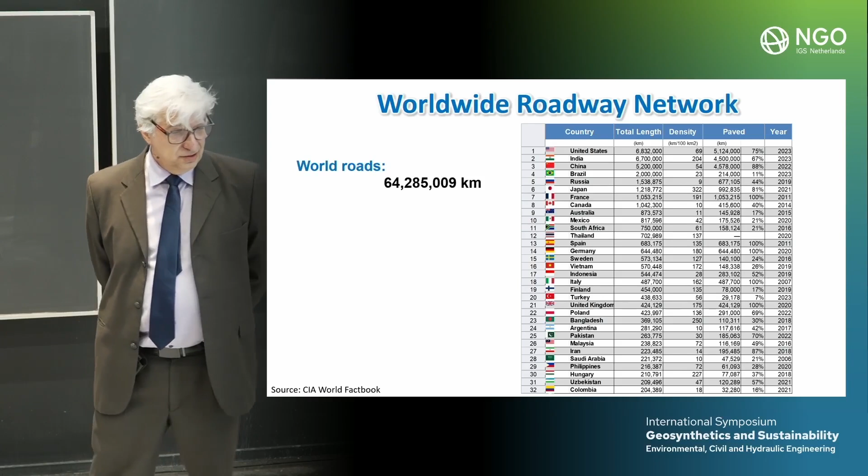It turns out that roadways is a massive asset. I understand that when it comes to public assets, roadways is the most significant public asset that we have, at least in the US for sure, and I suspect in the world. Here is the ranking of the network length, and the total length of all roads is 64 million kilometers. To have a sense of what this means, look at that. If you look at the first line here, the US has approximately 10% of the world's roads.

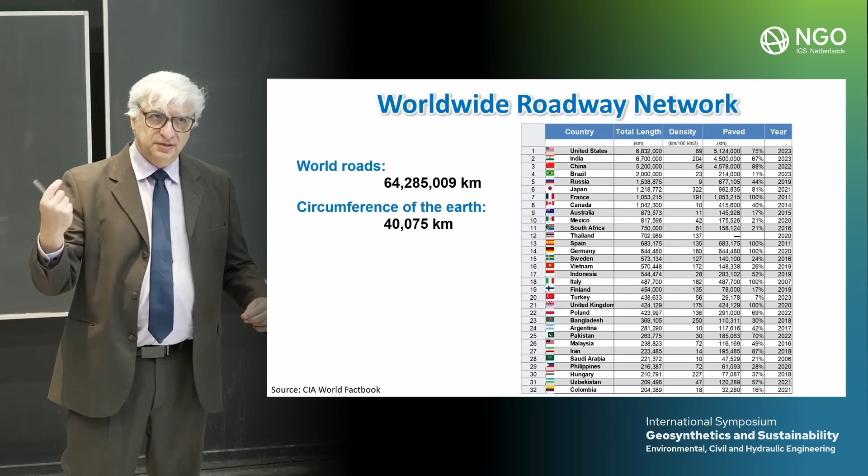Now, how big is this? Let's take the circumference of the Earth at its largest diameter at the equator. It is 40,000 kilometers. What does this mean? It means that if we were to lay the 64 million kilometers around the equator, once, twice, 3 times, 10 times, we would need to go 1,600 times around the equator in order to start thinking of how big of an asset this is.

These are roads that need to be constructed. These are roads that need to be maintained. The typical design life of a roadway is 15 years, so they are designed to be reconstructed.

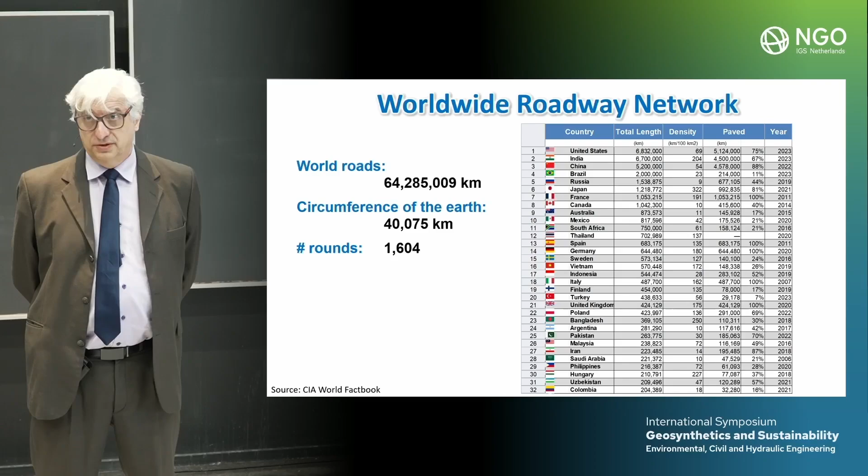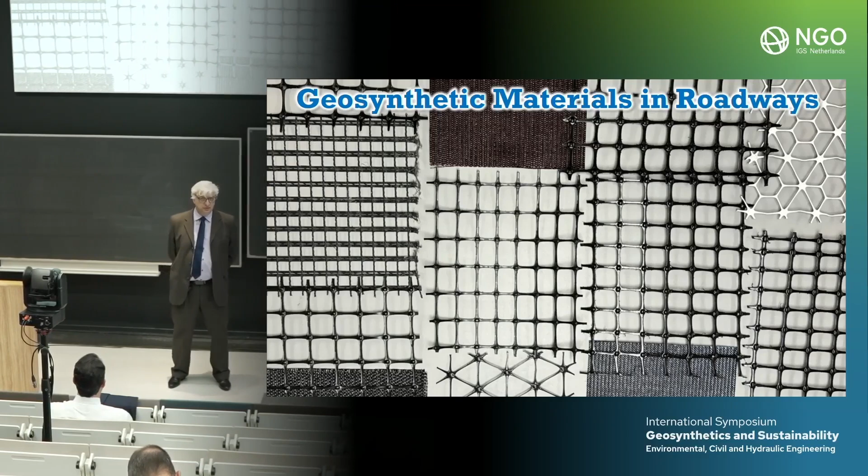Let's talk about geosynthetics, the second aspect of my presentation. There are many different wonderful types of geosynthetics, but I'm going to be talking about those used for roadway applications. That includes geotextiles, and that includes geogrids. Now, where do these geotextiles and geogrids get into the roadway?

All right, but where can geosynthetics help us in building better roads? We define geosynthetics, or an important aspect of geosynthetics, by their functions. This is because once we identify the function of a geosynthetic, we are almost there—not there, but almost there—in identifying the right properties. It's a long way to identify what are the right functions of the geosynthetic for a given application. Roadways are particularly confusing because there are so many different applications that it may get confusing to identify what are the right functions to work with.

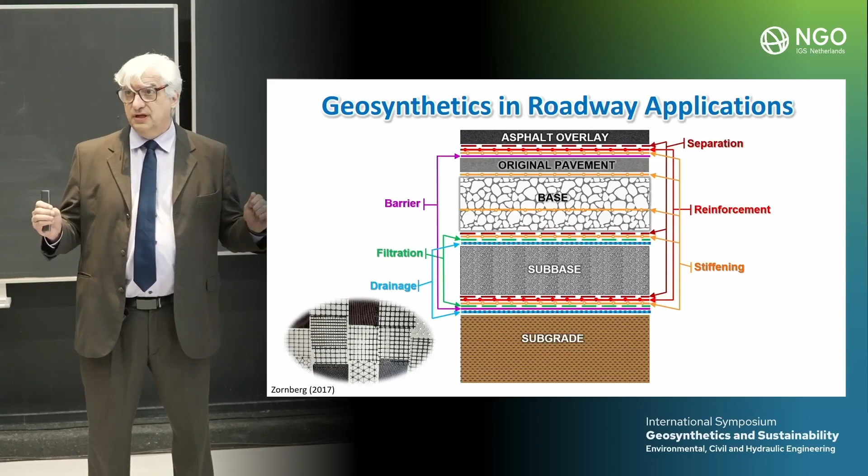All right, the third topic I'm going to speak about, but quickly, is carbon emissions. We're talking about equivalent carbon content. This is not the only way, but probably one of the most common ways of quantifying the gas emissions that affect global warming, for example.

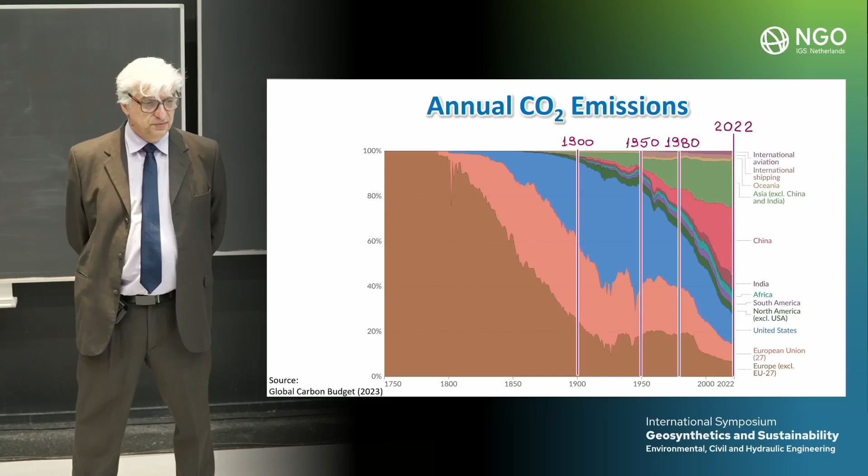So what I'm going to do now is identify 6 different applications involving geosynthetics in roadways. These are not simple applications. It's not 'give me a geosynthetic, I'll improve the performance of the roadway.' No — what aspect of the roadway do you want to improve? Only at that point will I know what functions I need, and only after I know the functions will I know what properties are required.

I'm going to focus on 6 of them. First, mitigation of reflective cracking in structural asphalt overlays. How many of you know what roadway design is? Any idea, vague concept of roadway design? Okay, just to understand how much I need to explain. All right, so we're going to start by looking at the mitigation of reflective cracking on structural asphalt overlays.

Second, stabilization of unbound aggregate layers. Third — and I'm going from the top down in the structural package, so an asphaltic layer, then unbound aggregates — then I get to the interface between the unbound aggregates and the subgrade: reduction of layer intermixing, reduction of moisture in structural layers, very different applications. Then, if I have soft subgrades, stabilization of soft subgrades, and then mitigation of distress due to shrink-swell subgrades.

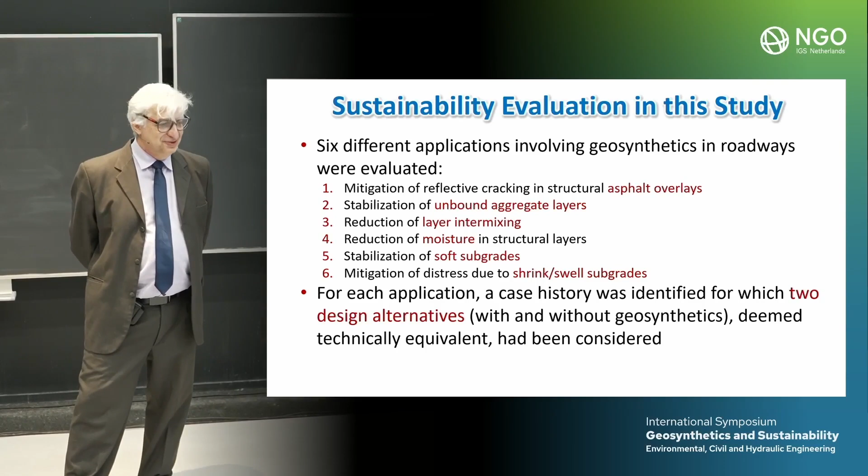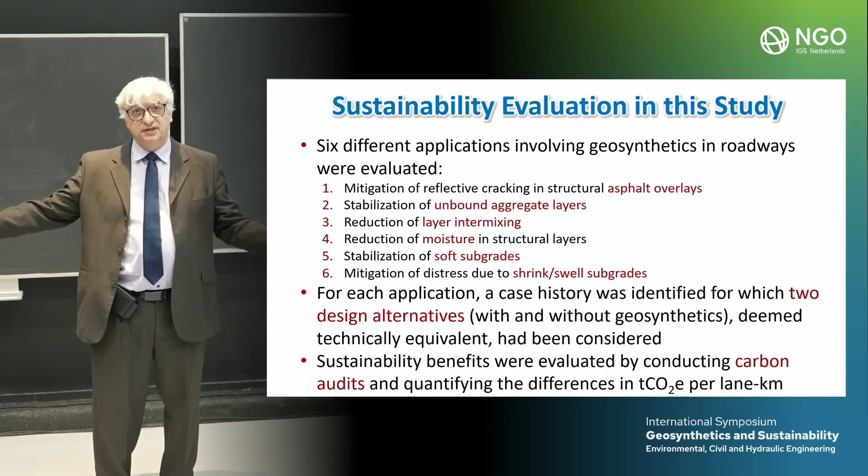So essentially, I'm going to do carbon audits. I'm going to show you the results of carbon audits of pairs of alternatives in 6 different applications. Now, I'm going to go very quickly, but it's not just me.

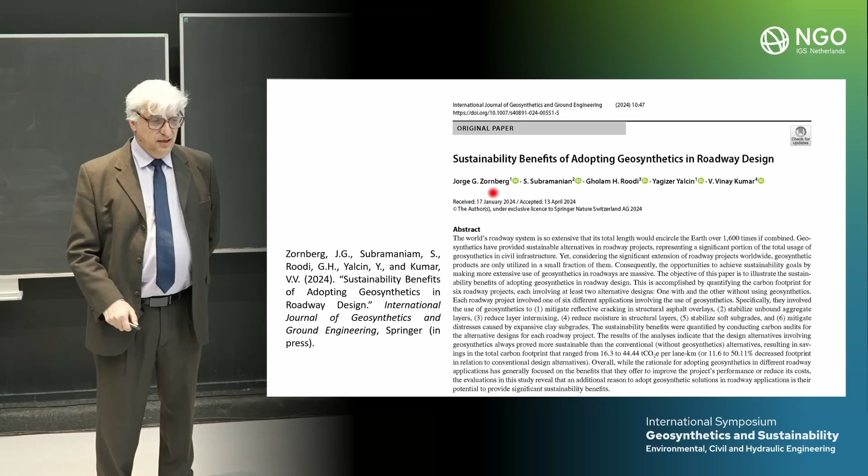This is still in press, but it is already available online. The information that I'm going to be showing you here is available in this very recent paper.

First application: mitigation of reflective cracking in asphalt overlays. What are we going to be doing? If you know what an asphalt overlay is, essentially we mill the surface of the roadway before it reaches its ultimate design life and apply a fresh overlay of asphalt. That extends the design life of the roadway. But there is a problem: this fresh asphalt is placed on top of pre-existing cracks. This creates a stress concentration that may cause a propagation, a reflection of the pre-existing cracks into the recently brand new asphalt overlay. And we do not want that.

Geosynthetics have traditionally been used to prevent, minimize, or retard this problem associated with reflective cracking. Let me show you very briefly the mechanism for each application, because I want to convey that we're not doing magic. We're not just doing what we did because we saw that it worked. We're doing it because we know how the mechanisms work to make it work.

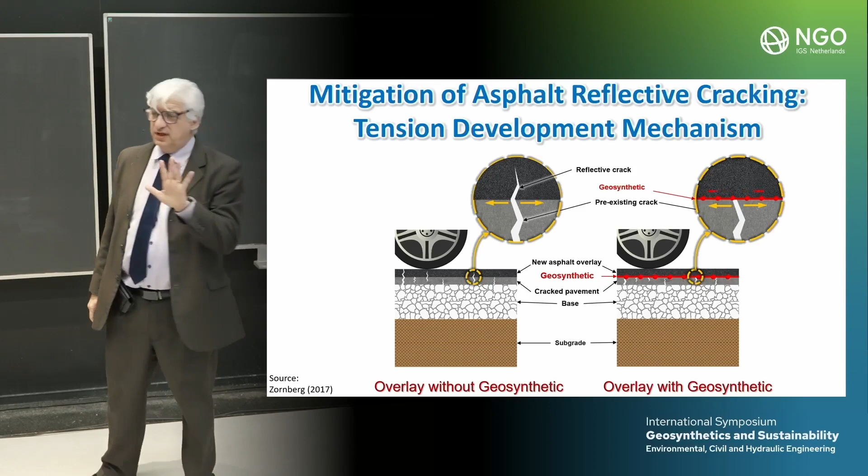What the geosynthetic will do is essentially develop tension, so that rather than having that stress concentration, the triggering of a crack is an energy concept. Rather than having that stress concentration at a very localized point, we're going to extend the area over which that straining occurs, and we're going to avoid the triggering of a crack. That's one of the mechanisms. That's not the only one, but I'm going to focus on this one.

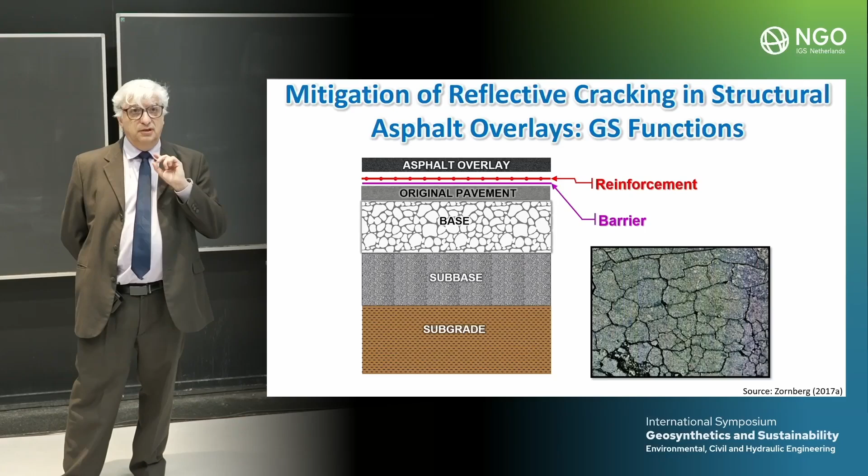So now that we understand the mechanism, we can talk about functions. The function in this case is going to be reinforcement, because we are going to be dealing with comparatively high strains. There is a different mechanism that I didn't mention here called stress relief, and there's a third mechanism called barrier. But I'm going to focus on this reinforcement, the tension development, as the one mechanism.

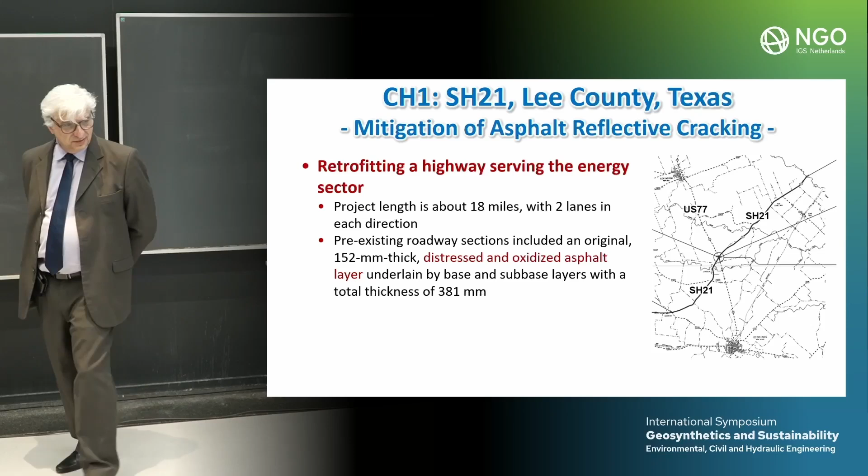So I'm going to take you now to Texas, near the place that I live. This is actually in the Austin district of the Texas Department of Transportation. And I'm going to talk to you about one important road. This road was particularly important because it serves the energy sector, fracking. What the energy sector requires is that suddenly comparatively small roads or low volume roads need a significant increase in capacity. The best way, rather than reconstructing the road, is to add structural capacity on top of the existing one. This takes us to asphalt reinforcement.

So SH21 is about 18 miles, around 30 kilometers, going from the border of one county to the end across SH21. This is Lee County. An important aspect of this project is that, in addition to having been designed to have asphalt reinforcement, we also took the opportunity to do some highly instrumented test sections. So if you're interested in this topic, you will hear a lot about SH21 in a few years.

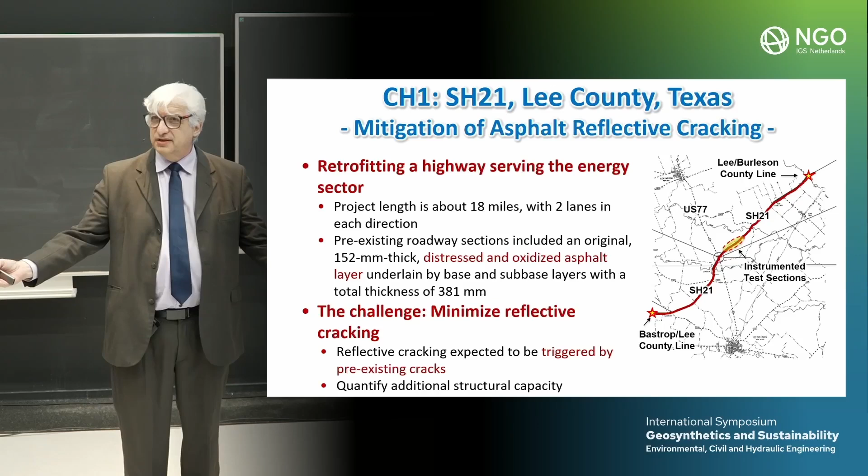So what is the challenge with this particular application? We need to retard, minimize, or hopefully eliminate the reflection of the cracks. But there's one more thing: since we're having this reinforcement to avoid the reflective cracking, does it provide any additional structural capacity? Everyone knows that the answer is yes, but we do not know how to quantify it. It is only now that we're starting to quantify the improvement of this reinforced asphalt to the increase in structural capacity. We're going to try to do that.

So in this particular project, the design requirement was to minimize the reflective cracking and hopefully increase the structural capacity. The conventional design was essentially adding a reasonably thick, 127 millimeters, that's 5 inches, of asphalt. That's more than what is needed for transportation from a capacity point of view, but it's essentially to minimize the reflective cracking.

What is the alternative? If you add a geogrid reinforcement, essentially you are trimming 50 millimeters or so of that new asphaltic layer. So how are we going to compare?

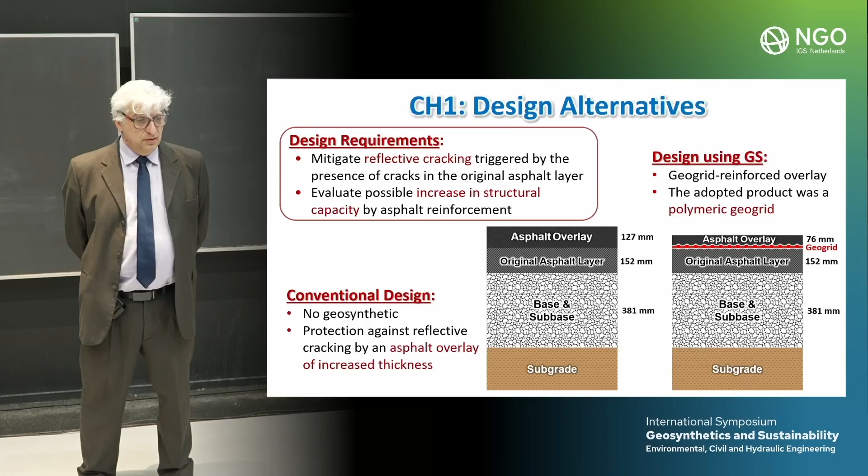Just so you know very quickly how this is constructed: here you need to do some milling, then you're going to apply a tack coat, then you are going to install, in this case, a polymeric geogrid. Finally, you construct the asphalt overlay, essentially the same approach using the same equipment that you would use without the geosynthetic.

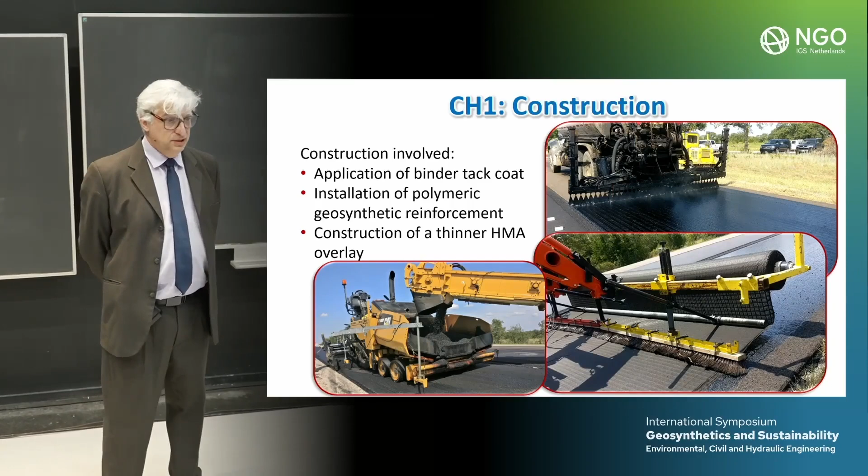So let's do the carbon audit. There were 2 design alternatives that the designers considered, and they ended up going for the geosynthetic solution for cost evaluation. They deemed that the cost of a geogrid layer was more effective financially than 2 inches, or 50 millimeters, of asphalt.

But let's see what happens if we compare the carbon content of these two solutions. Here we have the conventional design and the geosynthetic design, with their different components. I'm not going to walk you through how we did this carbon audit, but essentially, in blue you have the embodied carbon in the materials themselves, then transportation in orange, and then construction.

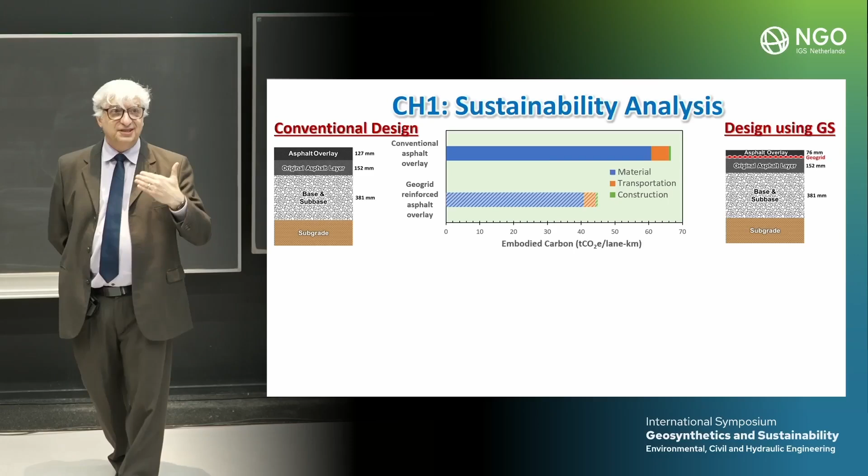Materials carry significant burden, and we're only talking about the materials for the overlay, not the entire structural package. Any time we see an asphaltic layer, think of embodied carbon. The asphalt carries a lot of embodied carbon, so any inch, any centimeter of asphaltic layer that we can drop, we significantly save in embodied carbon.

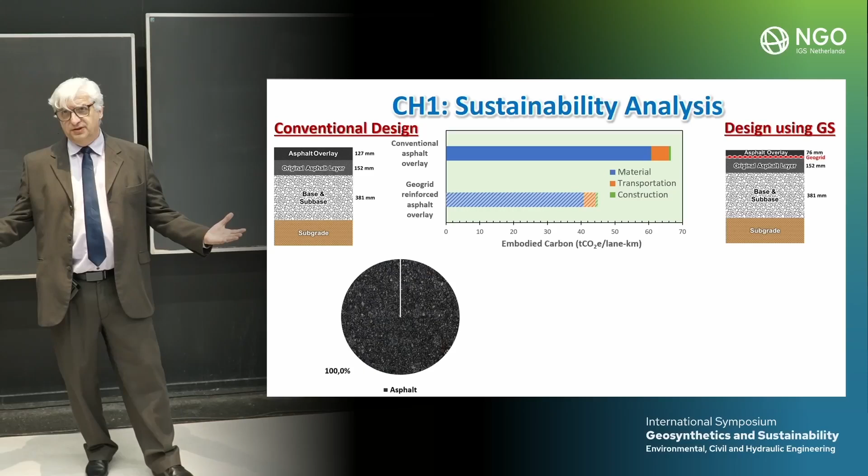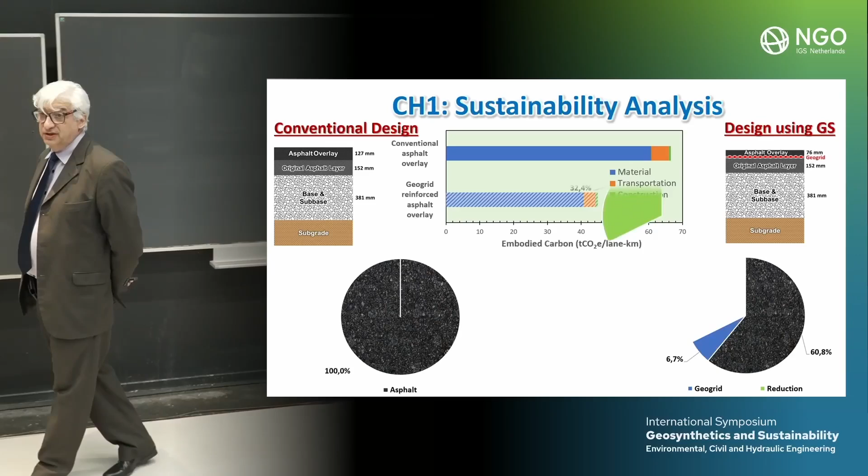Let me show you what this means. In the conventional design, because it's just an asphaltic layer, the entire source comes from the asphalt. If we go to the geosynthetic solution, we decrease the contribution from the asphaltic layer. We have a contribution from the geogrid, but we save this green 32%.

32% of the embodied carbon of the entire project was saved by choosing this solution. And again, the designers didn't think of embodied carbon when selecting it, they just did it based on performance and cost, but by doing so you save 32% of the embodied carbon.

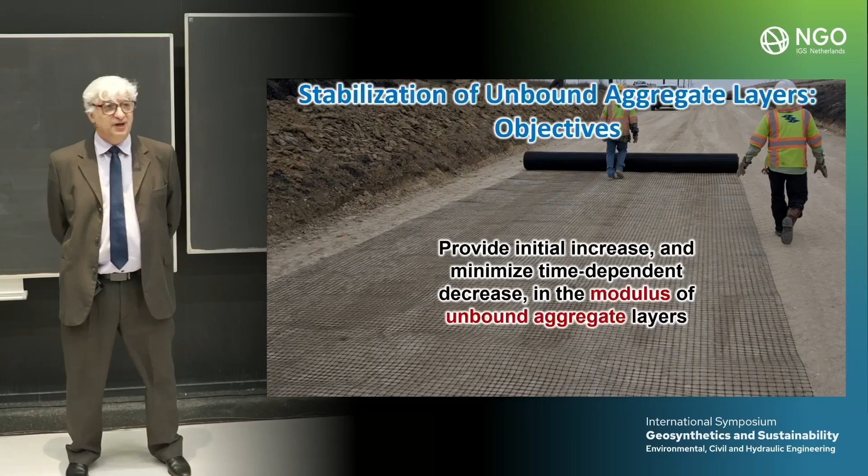All right, so we have application number 1. Let me walk you through a second application of geosynthetics in roadways: the stabilization of unbound aggregate layers. The objective, what do we ask for this unbound aggregate layer? We ask, give me stiffness. I want stiffness, because stiffness will distribute the load in a wider area.

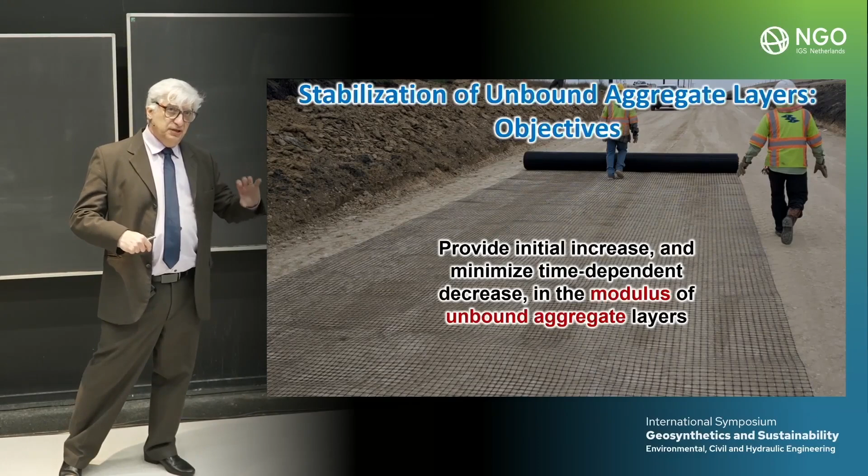So the objective of using geosynthetics for this application is to provide an initial increase, and equally or more important, to minimize or avoid the decrease of the modulus of the unbound aggregate layer, the base and subbase. So how does this work?

And it's not trivial how this works. There were many competing mechanisms that academia and industry were debating, what is the right mechanism. We know that it works, but we didn't know why. We need to know why it works, because without that we cannot choose the right functions. But this is how it works, there is consensus on this.

The consensus is on a mechanism called lateral restraint. Here's how it goes: you have a non-stabilized road base, and with the cyclic loading that takes place, there's a tendency for the aggregates, which are clean aggregates and only stiff because they are confined, to displace laterally over time. And this is a domino effect.

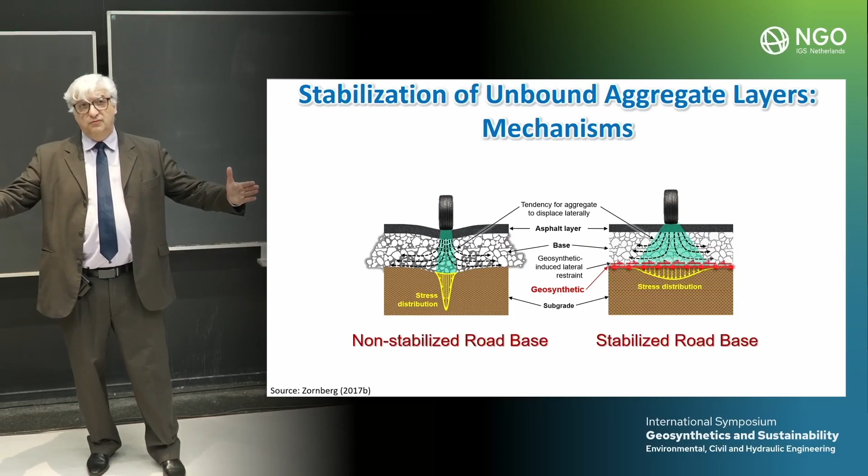If we have that lateral displacement, we have a loss in confinement. If we have a loss in confinement, we have a loss in modulus. If we have a loss in modulus, we have a highly concentrated load, and that leads to early failure of my roadway. Instead, what the geosynthetic will do is essentially prevent or minimize this lateral movement, that's why we call this mechanism lateral restraint.

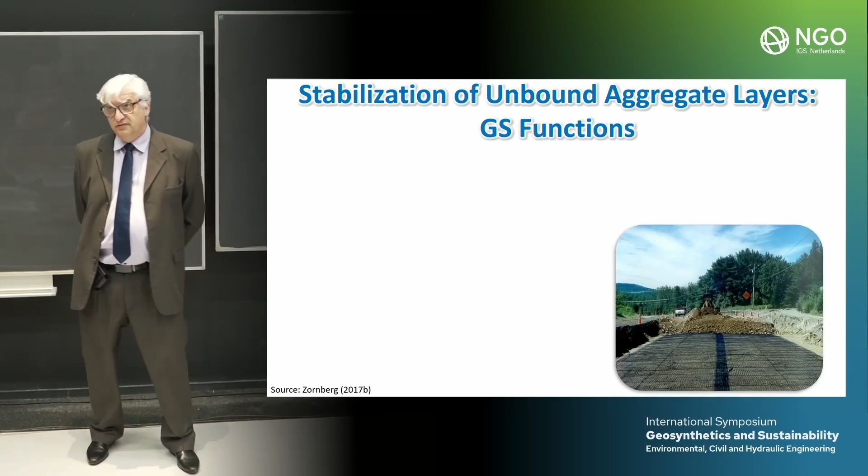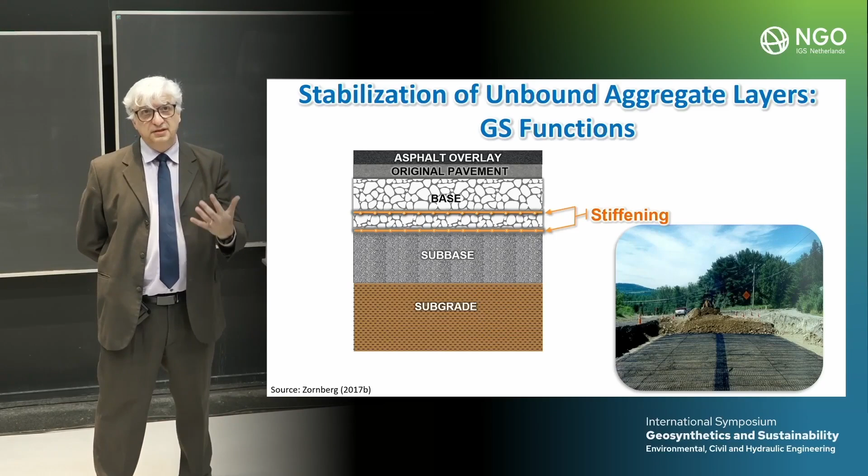So only now that we know the mechanism, we can go to the function. And the function is only one: the function will be stiffening. We want to add stiffness, or the capability of gaining stiffness, to our unbound aggregate layer.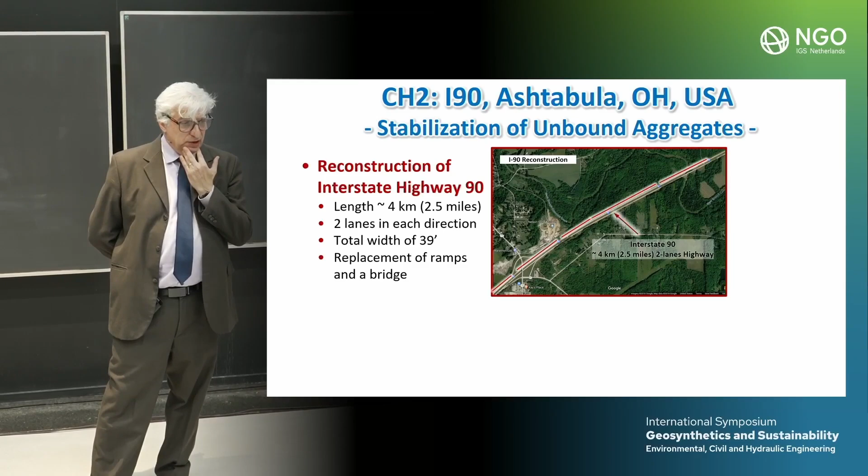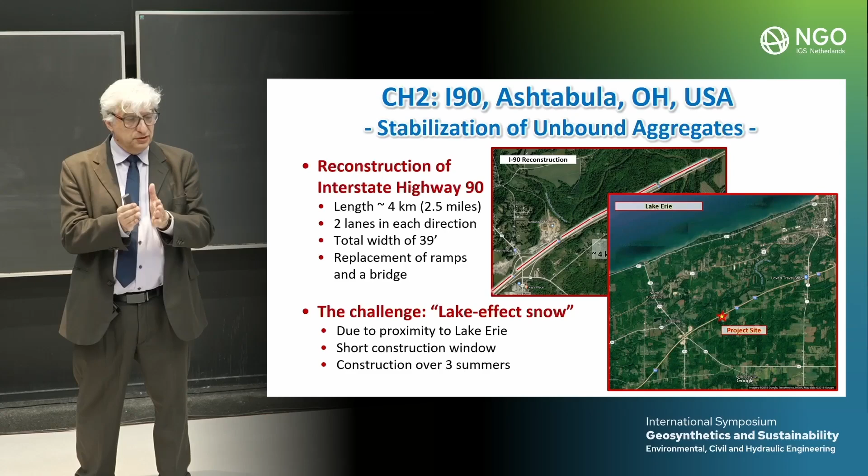Let me take you to an example, a project. This is in Ohio, also in the US, for stabilization of unbound aggregate. This is near Lake Erie, a 4 kilometer road with 2 lanes. The big challenge in this project is that because it is very close to Lake Erie, there is a phenomenon called the lake effect snow, so the construction season in this area is very limited, only a few months. So the construction was estimated to take place over 3 years, 3 summers, only during the summer.

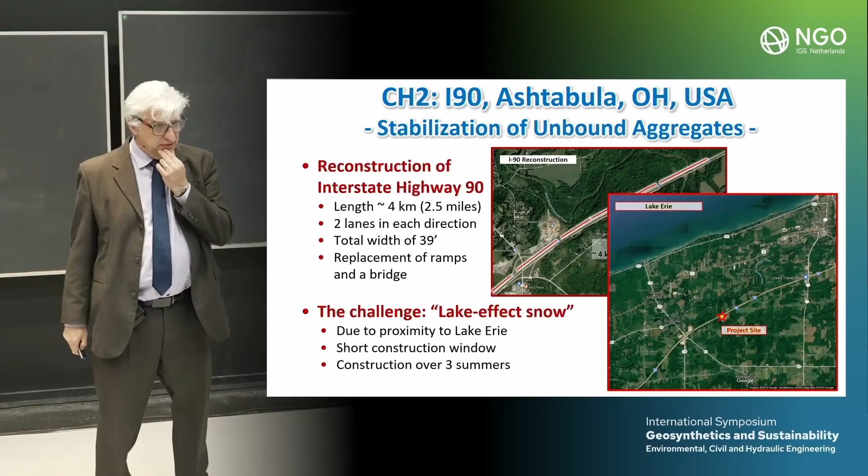The requirements were to remove the old pavement and a thick subgrade layer and replace it with high quality material. That was the job. So the conventional design would be: no geosynthetic, an excavation of 900 millimeters, and then a replacement with 2 different types, 2 different qualities of aggregate, and finally an asphaltic layer.

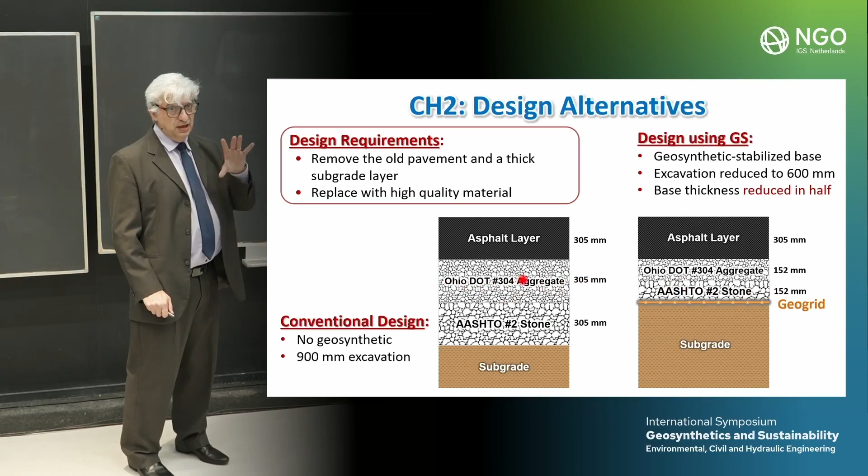This was the alternative solution considered, using geosynthetics. Essentially, what they did is shave off 150 millimeters of aggregate, half the thickness of each of these 2 different types of aggregates, because a geogrid was adopted, while keeping - and probably this is a mistake from the point of view of embodied carbon - the thickness of the asphaltic layer. An alternative could have been to reduce the thickness of the asphaltic layer rather than reducing the thickness of the base. But we didn't know any better, or the designers didn't know any better. They were just focusing on cost and performance.

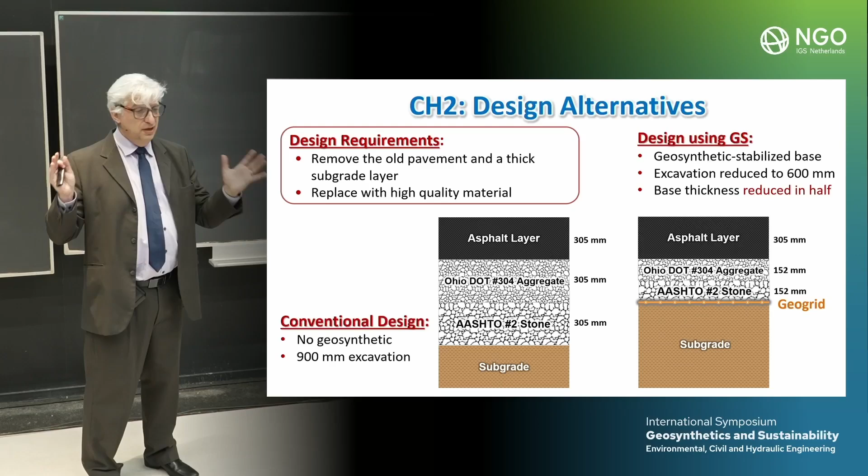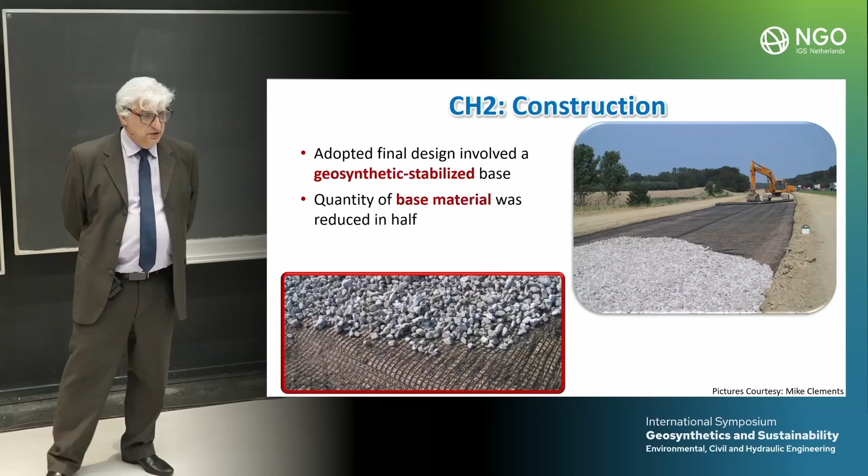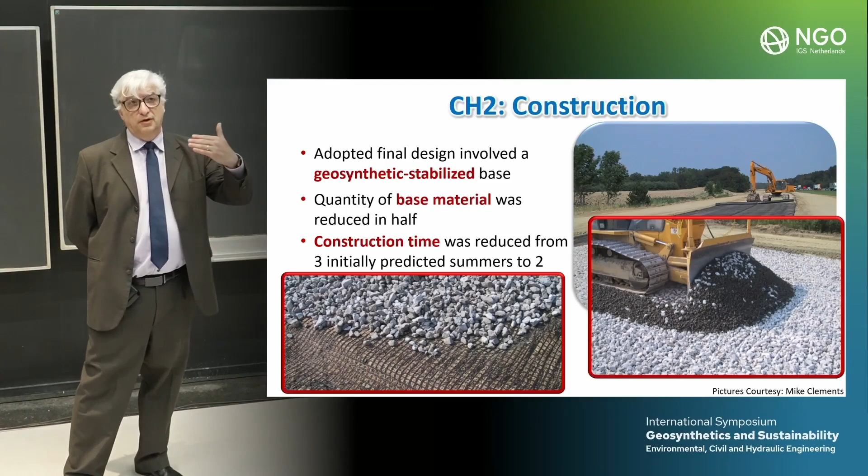So very quickly, the construction involves a geosynthetic stabilized base. This was the placement of the aggregate on top of the geosynthetic material. The construction time was reduced from 3 summers construction season to 2 summers - one third less. Not only was it less expensive, it was also faster.

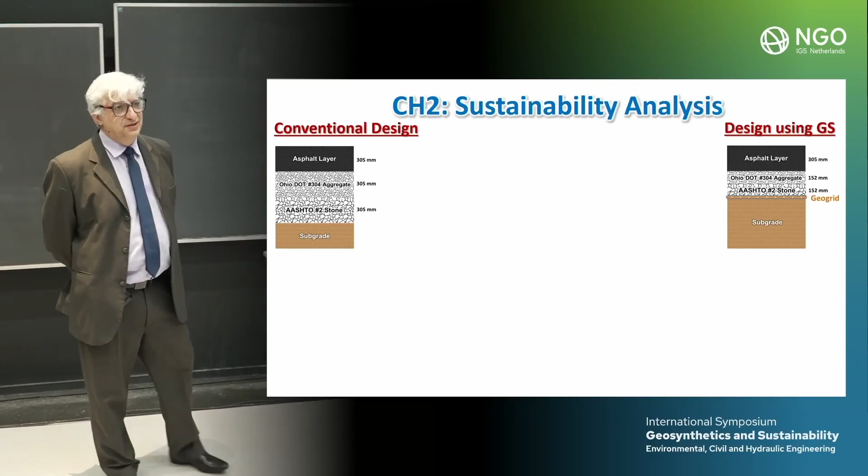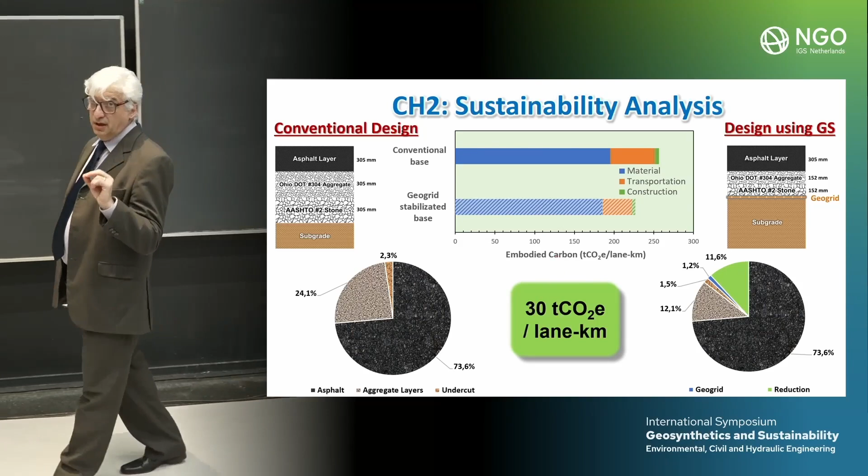This small contribution is because of the excavation, which also carries some embodied carbon. So we are not going to touch this - the entire effort will be to decrease the embodied carbon only on the aggregate layers. And this is the result after using the geosynthetic solution: a savings of 11% on the project's embodied carbon. But don't think that this is small - this is actually more when we look at tons of embodied carbon per lane kilometer, more than the previous project, 30 tons of embodied carbon per lane kilometer.

Very significant reduction. Third application - so I walked you through minimizing, application number 1, minimizing the asphaltic layer and minimizing the reflective cracking of the asphalt overlay. Then I talked to you about stabilization of unbound aggregate layers, now avoiding intermixing. We want to avoid the contamination of the base material.

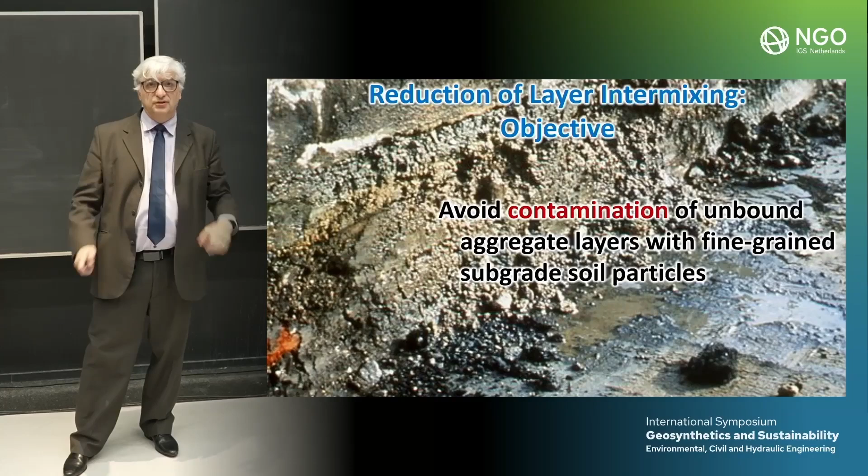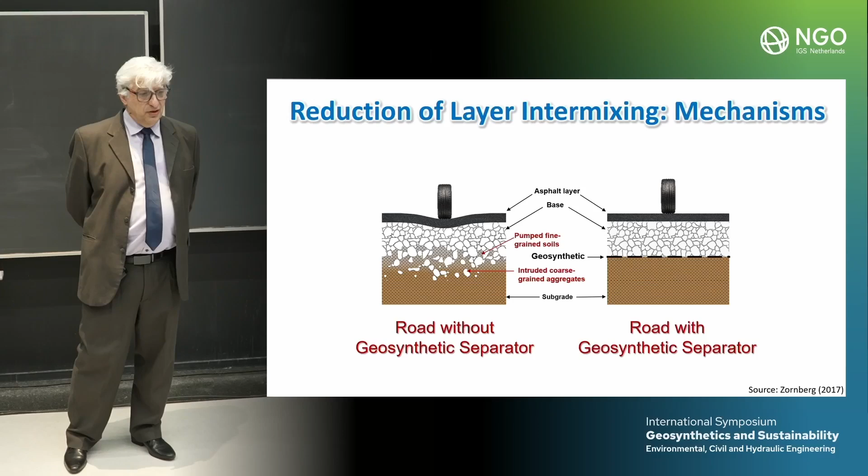Here is the mechanism that will take place: without a geosynthetic separator, fines will be pumped into the base, and aggregate particles will sink into potentially a soft subgrade material. Here it is. Instead, this is a very simple solution - all we're going to be asking for this geosynthetic is to just be a separator. So with a geosynthetic separator, essentially we may avoid that intermixing.

So now that we know this, essentially what we're asking is separation and filtration. And these are essentially the geosynthetics that fulfill this requirement, even though they need to have some characteristics. Essentially what we are asking to function as a separator is that the geosynthetic should just exist. If the geosynthetic exists, it will work as a separator.

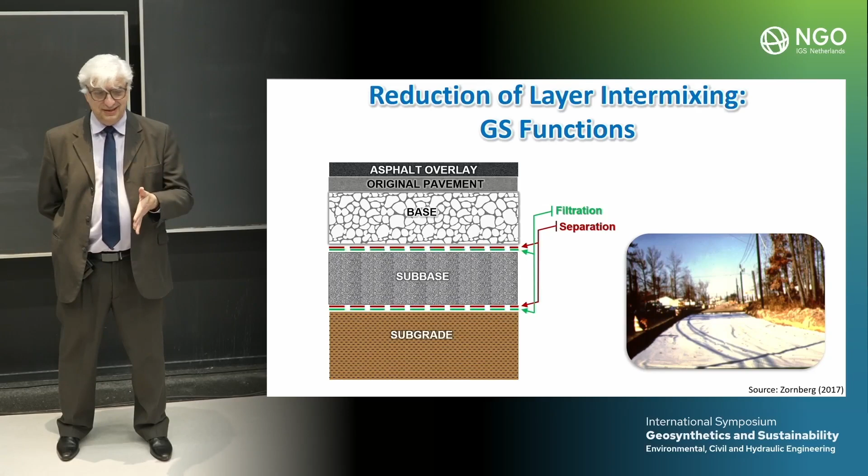Let me take you to another project. This is kind of a more difficult project to quantify because typically we're not going to replace any layer as we did in the previous one. In the previous ones, we replaced a fraction of the asphaltic layer; in the second, we replaced a fraction of the unbound aggregate.

This is different. This is going to work with performance. So we will need some additional data. Let me take you to this site in Virginia.

The challenge was how to quantify the benefit of a geotextile separator. We know that it works. We do not know why. And this is what these researchers did.

Essentially, the conventional design needs to achieve the expected design life of not exceeding a 20 millimeter rutting depth. That is a design life based on serviceability.

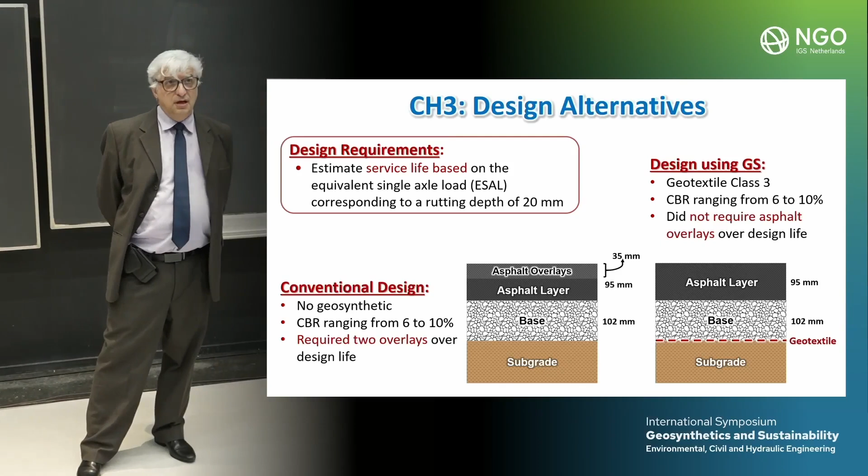In order to achieve that, in the conventional design, they needed not only to have the initial asphaltic layer, but replacing twice that asphaltic layer with an asphalt overlay. What the geotextile achieved is essentially keeping the same initial asphaltic layer, without having to go back and do the asphalt overlay.

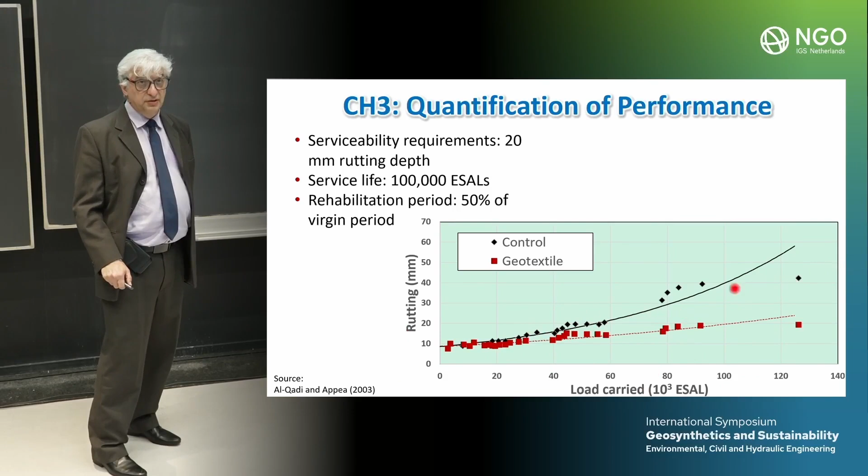This was the only way to quantify this, by getting data, which is very difficult to obtain. So here what we have is rutting depth versus number of cycles. And here we have the control section without geosynthetics and the section with a geotextile.

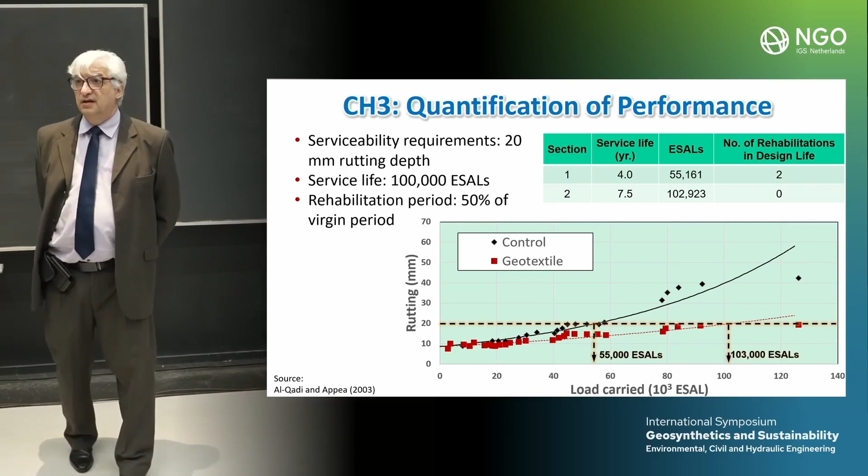If our design criterion is not to exceed 20 millimeters of rutting depth, what this is telling us is that the number of cycles of a standard axle was 55,000, while with a geotextile it was over 100,000, which was the required number of axles for the design life of this structure.

So let's compare the alternative. The only difference between these two alternatives is not at the end of construction, they are the same. Only one has a geotextile. Actually, at the end of construction, the embodied carbon of the geosynthetic one is slightly higher, because one has a geotextile, the other doesn't. The difference is going to come when we account for the maintenance.

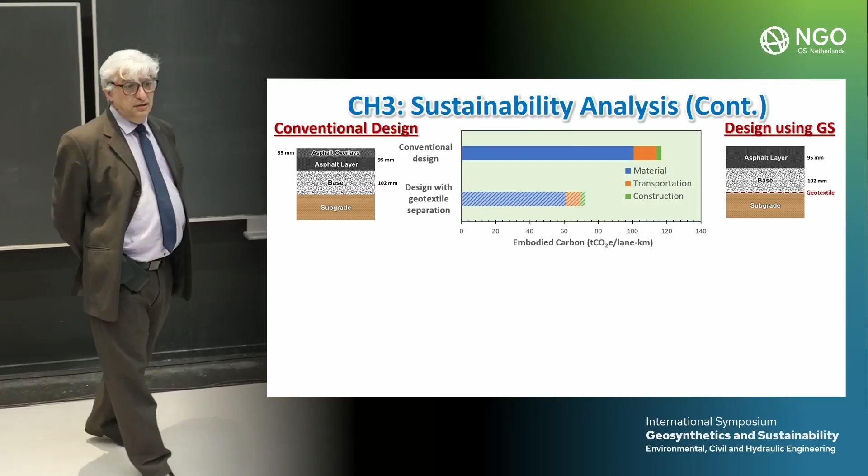And the difference is very significant. The difference is going to be in materials. The embodied carbon, it contributes, asphalt contributes significantly to the carbon audit.

So here is asphalt, and this is base, and this is subgrade. When we go for the geosynthetic solution, essentially we have eliminated going back over the design life twice and having to replace a fraction of the surface in the asphaltic layer.

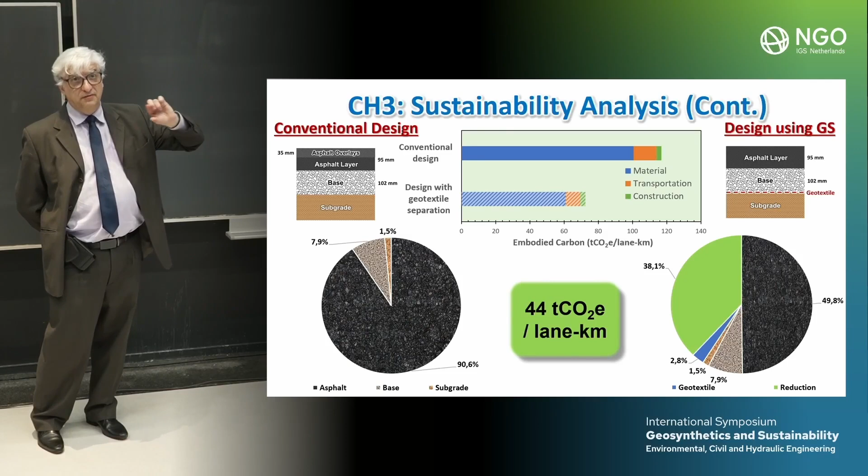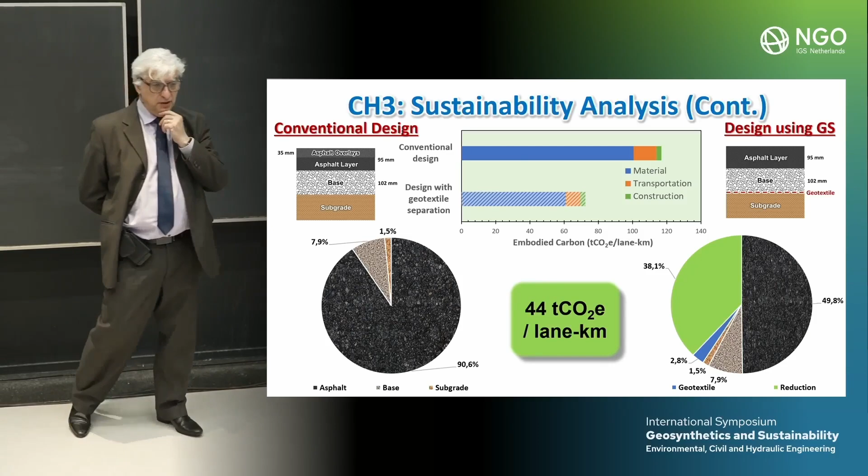44 tons of embodied carbon per lane kilometer. Everything is normalized for 1 lane, 1 kilometer. Significant contribution. Another application, this is 4th out of 6.

Improving drainage, providing in-plane drainage. This is not easy, because we're not draining like maybe in the Netherlands, where your road might be below the water table. In most of the world, that's not the case. In most of the world, really the water table is somewhat deep, but still you have problems with water.

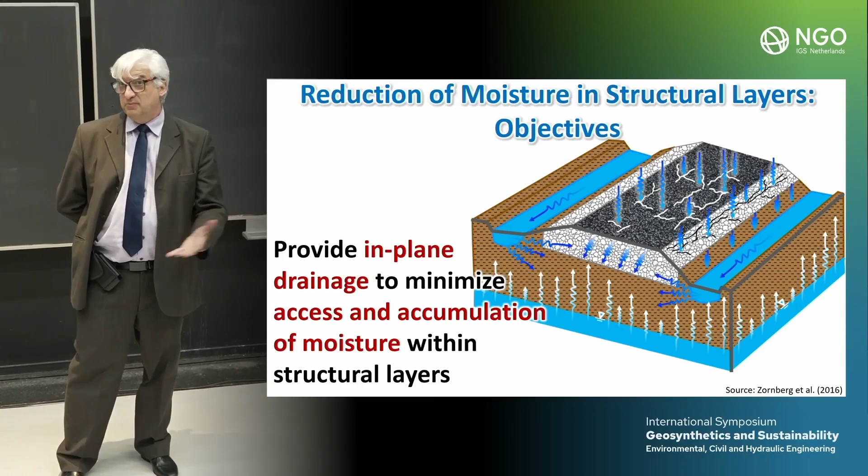And what you want is to decrease the moisture content, a high moisture content of a subgrade. And that's not trivial, because a typical drain would not do the job.

So here's the idea: if we have a presence of moisture, for example coming through capillarity into the structural package, that presence of moisture decreases the modulus, and the decrease in modulus increases the deflection and the rutting. The idea is that if you can eliminate that moisture before it makes it to the structural package, then you're doing a good job.

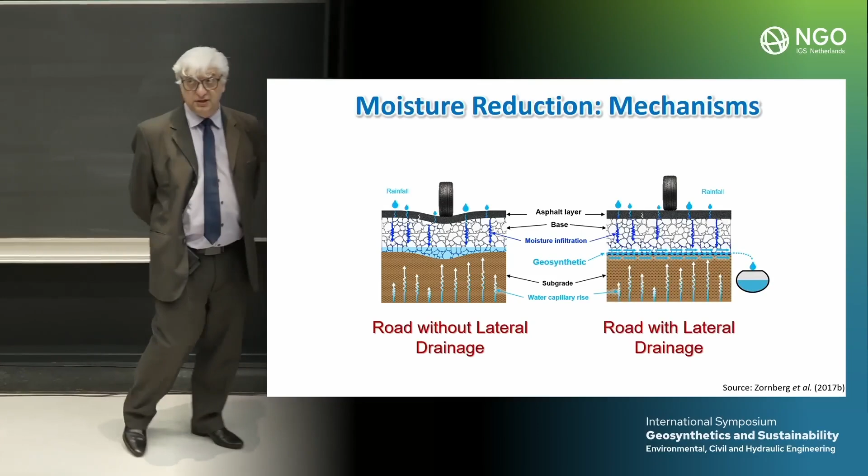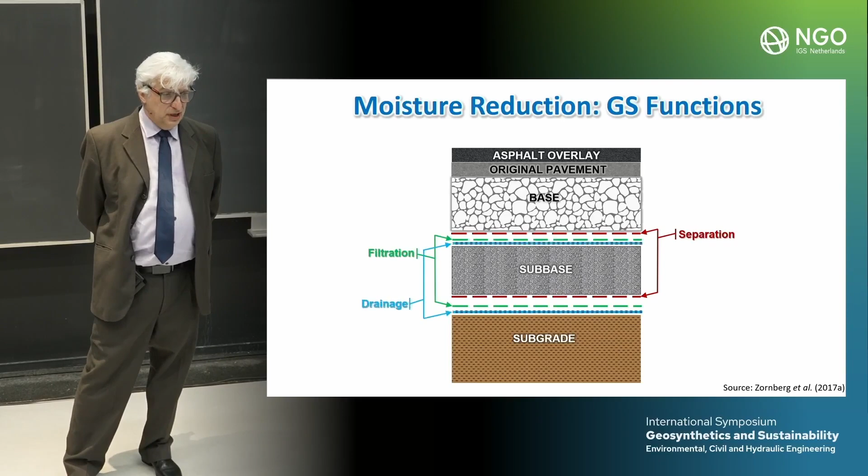So essentially, now that we know this, we go to the functions. You will have some separation, filtration, and the most important, in-plane drainage.

But this is not an easy way to do in-plane drainage, because we're not draining free water, we're stealing moisture. We're stealing moisture from an unsaturated soil, and we can only fight suction. The soil water is held in the soil by suction.

The only way to steal that moisture from the soil is with suction. The geotextile does not provide suction, a conventional geotextile does not provide suction. But some newcomers to the geosynthetic market can provide suction. This is how it works.

If we have a geotextile, typically we're going to have yarns and pores in between those yarns. That's what we quantify with, we call it transmissivity. That's not what we're talking about.

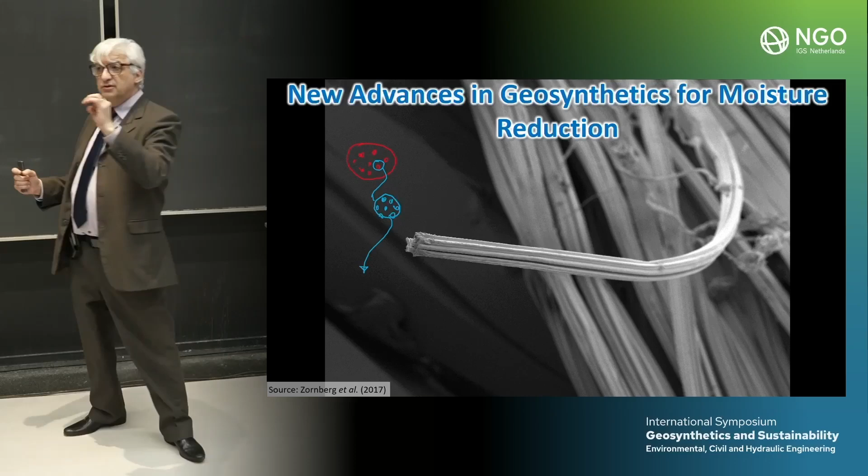Let's go to a yarn. A yarn is a bunch of fibers. The water could go in those yarns. That's not what we're talking about.

We're going to talk about one fiber. Let's go to one fiber. The cross-section of that fiber is special, so special that it has grooves. Think of these grooves as having higher surface tension, capillary tubes, having the capability of working as a capillary tube. It's not this volume of water, that's when it's free water. We're going to be talking about this volume of water.

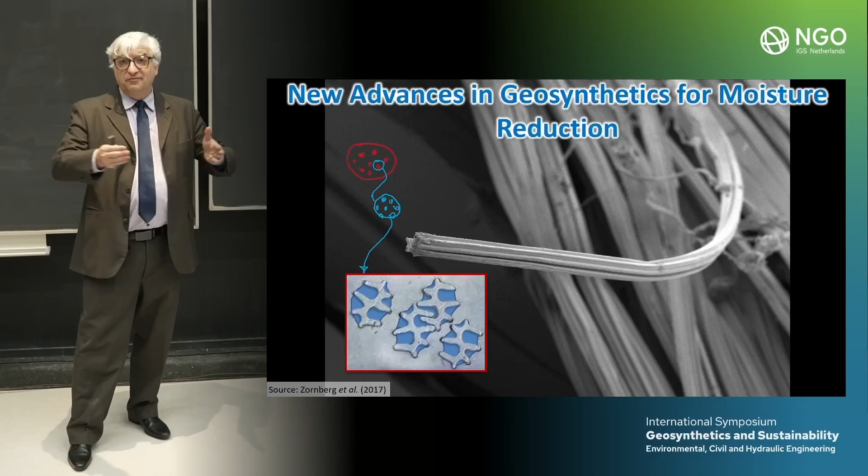Very small fluxes, very small. My friends in the US don't know what a liter is, so what I tell them is: for every 30 centimeters, one foot, don't expect any more than 5 bottles of water per day.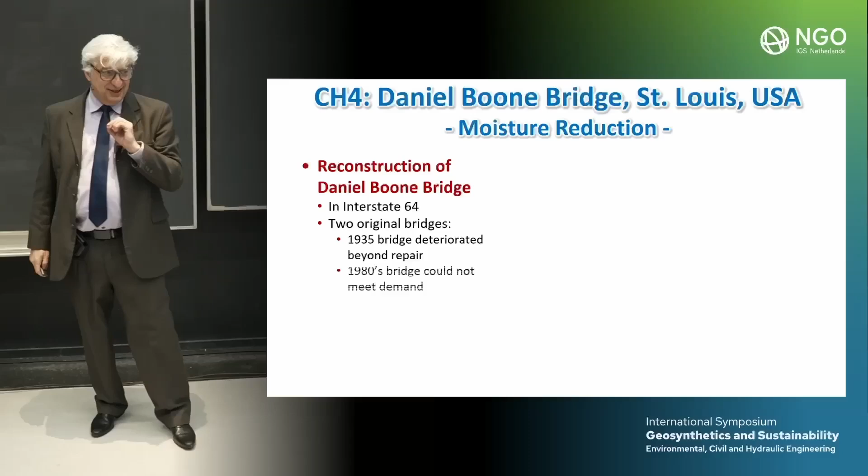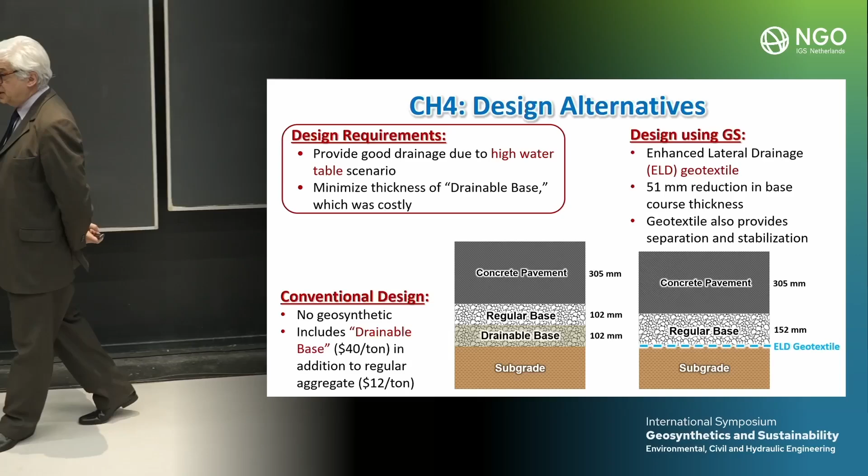Let me take you very quickly through a case history since I'm running out of time. This is a reconstruction of a site with a high water table. This is the conventional design that required a special drainage aggregate, and by using an enhanced lateral drainage geosynthetic, the thickness of that aggregate was decreased. The concept is that a geotextile wicks moisture that is under suction, above the water table, and here is the evidence of moisture being released.

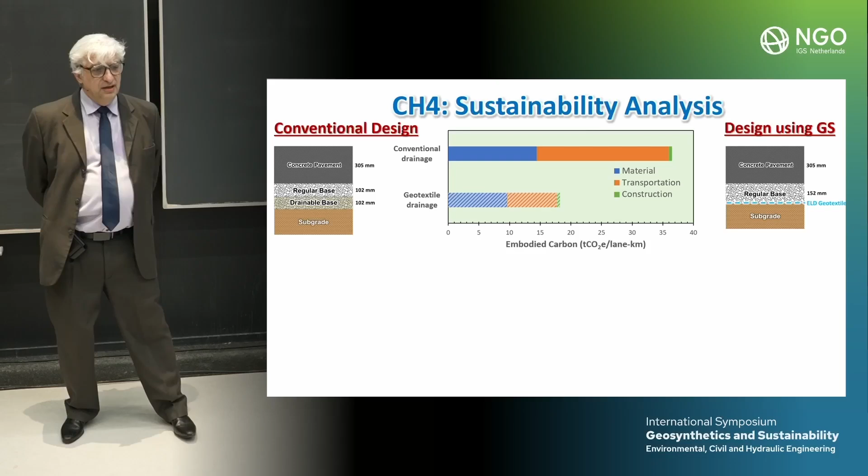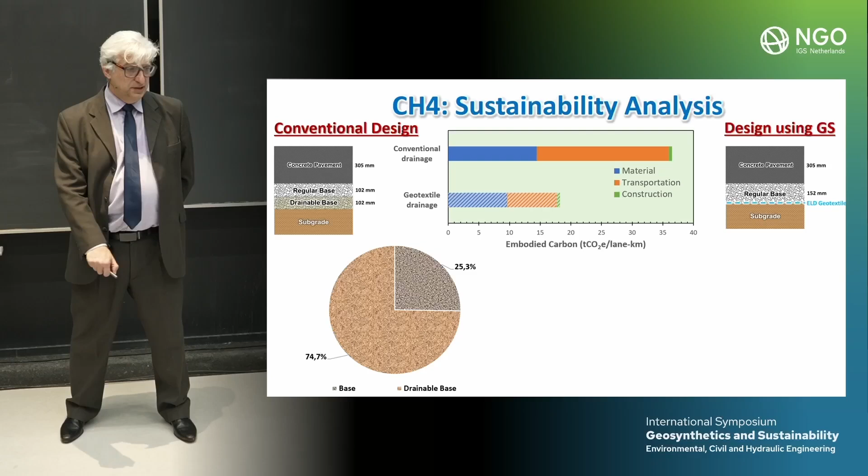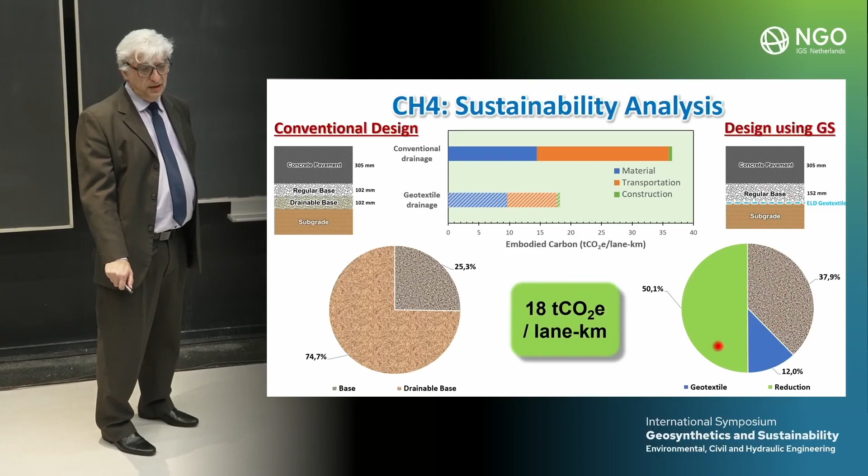Okay, let's compare quickly. This is the comparison, and this is a comparison in the carbon audit, very significant. They eliminated a significant fraction of the aggregate. This is the conventional solution, which includes the drainable base, a particularly expensive and hard to obtain aggregate. The geosynthetic solution got rid of this expensive aggregate and instead added only a thicker layer, and here we have the solution, the savings.

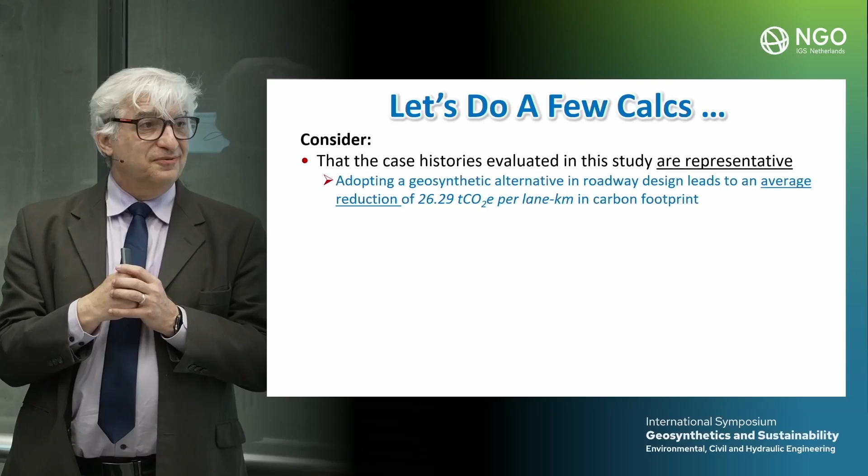So here's what I'll invite you to do: let's do a few calculations, with some very important assumptions. Consider that the 6 cases I've shown you are representative of these types of applications. In that case, I'll take the average reduction across all 6 applications: the average embodied carbon reduced was 26 tons.

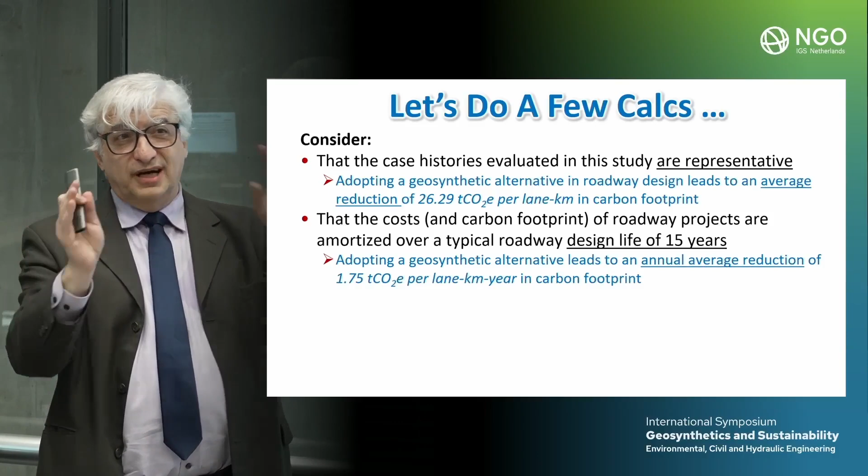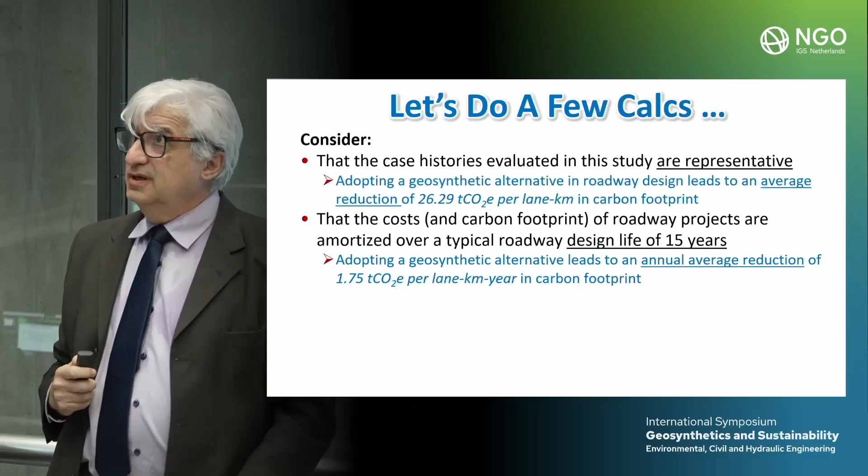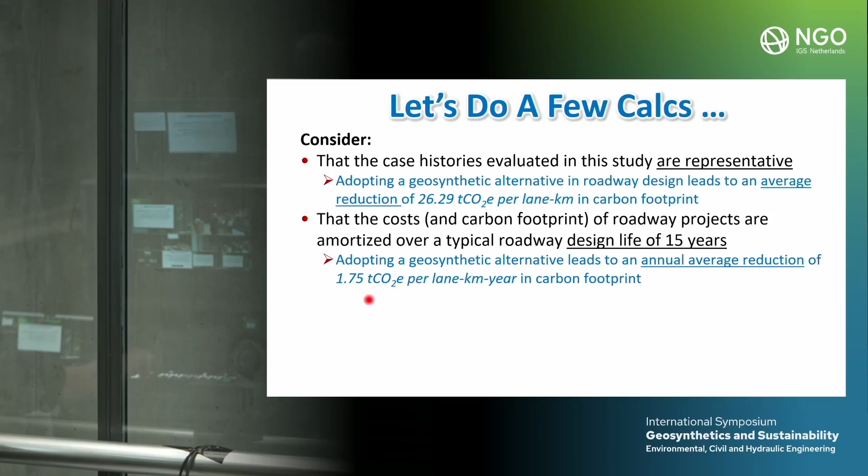Another assumption: that's embodied carbon per project, but I don't want per project, I want per year. I'll take a typical design life of a road as 15 years, so I'll divide that reduction in embodied carbon by 15 years. Assuming again that the cases shown are representative, that gives an average annual reduction of 1.75 tons of embodied carbon per lane kilometer per year.

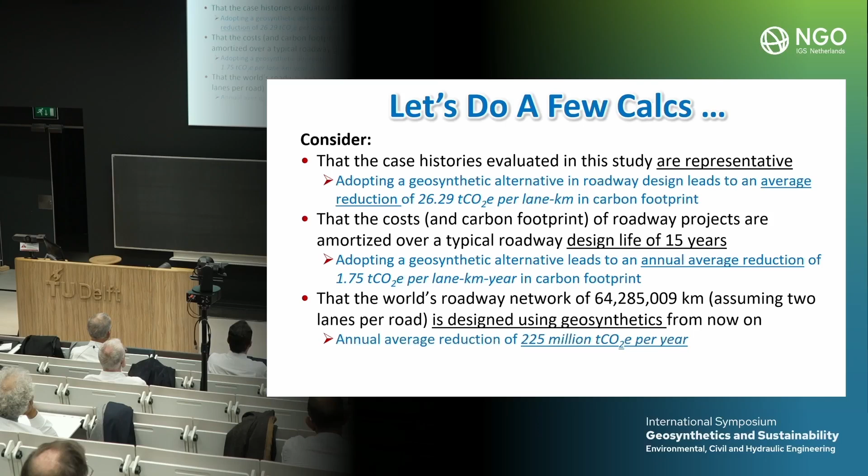One more assumption: let's assume every road in the world now realizes that because of cost, performance, and embodied carbon, they need to incorporate geosynthetics into their solutions. This takes us to an annual average reduction of 225 million tons of embodied carbon per year.

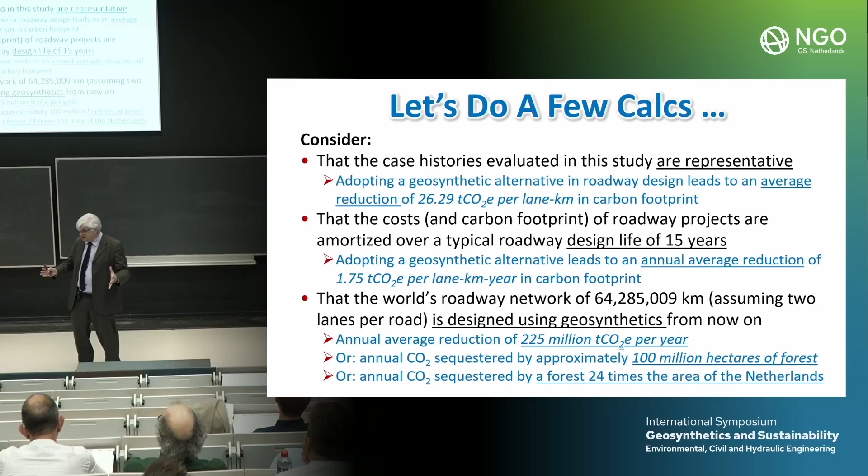What does that mean? Let me tell you. This is the same as the carbon sequestered by 100 million hectares of forest. What does that mean? Let's take the area of the Netherlands — this is equivalent to 24 times the area of the Netherlands per year, if all the roads in the world were to use geosynthetics, and in my opinion, they should.

So in conclusion, in road applications, geosynthetics have been shown to improve, often very significantly, the performance. In roadway applications, geosynthetics have generally, not always, but generally led to cost-effective solutions. Finally, geosynthetics have consistently led to more sustainable solutions. Another way of saying this: not only can geosynthetics in roadways reduce embodied carbon, but the volume of roadways in the world is so significant that the potential benefits to global warming of using geosynthetics in roadways is truly massive. With that, I thank you for your attention.